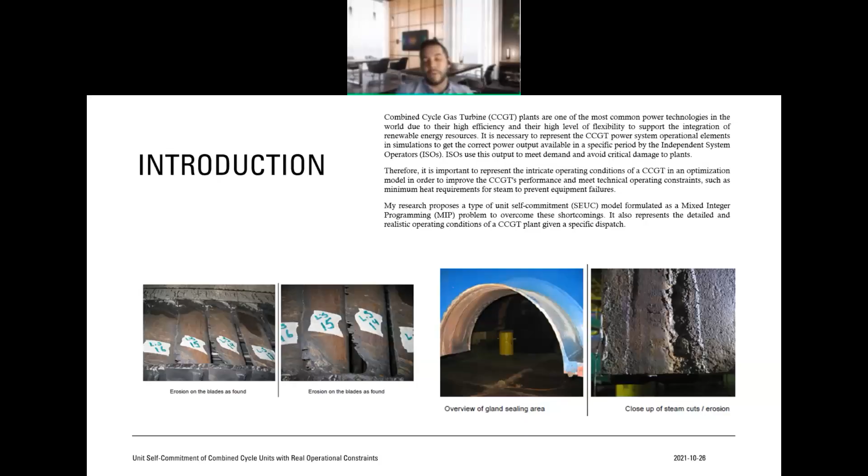Talking about what a combined cycle plant is—this is not a new technology. What we have to say about this technology is that it's the coupling of two different cycles, the Rankine cycle and the Brayton cycle, or in other words, the steam turbine cycle and the gas turbine cycle. The output of the steam from the steam turbine is still the result of the steam produced or generated by the gas turbine. So we are looking here, for example, at one combined cycle unit with one natural gas turbine and one steam turbine.

So with the gas turbine, we produce steam that still has good thermal properties, and we pass this steam through a heat recovery steam generator, or HRSG element, as we know it in the territory. Then the steam is used in the steam turbine to generate more power. So this configuration allows a very efficient use of the fuel.

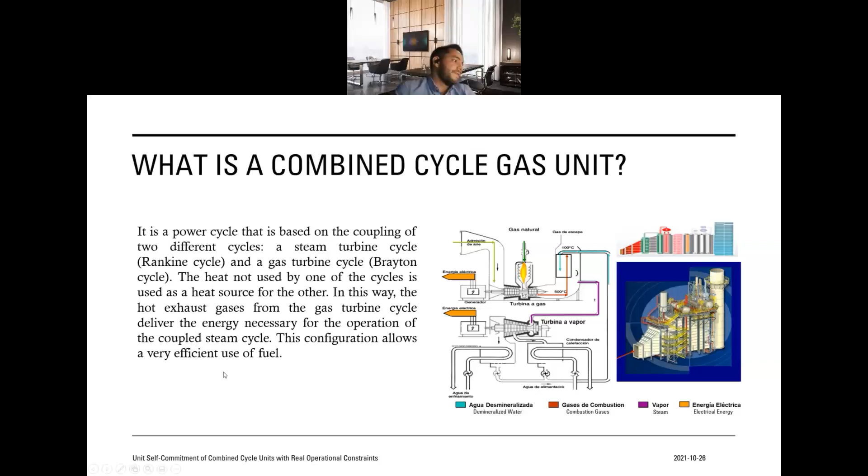Now I'm going to talk about another concept, the dispatch method. Why do we do a dispatch method? Well, we do the dispatch, or economic dispatch, because we need to optimize three basic energy industry functions or requirements: the instantaneous equilibrium between supply and demand—related to frequency—network congestion management, and the short-term electricity trade.

These three basic energy industry requirements become an output of the dispatch in a spot market.

So we have two options to do this: we can do a decentralized dispatch or bilateral model, like we have a lot in Europe, or a centralized dispatch, or pool model. In this kind of centralized dispatch, we have two options, a tight pool or a loose pool. A tight pool is a dispatch based on cost, where the ISO decides which plant is going to generate for the next day. In the loose pool, it's a dispatch based on prices or bids, where the owner of the generation makes a bid.

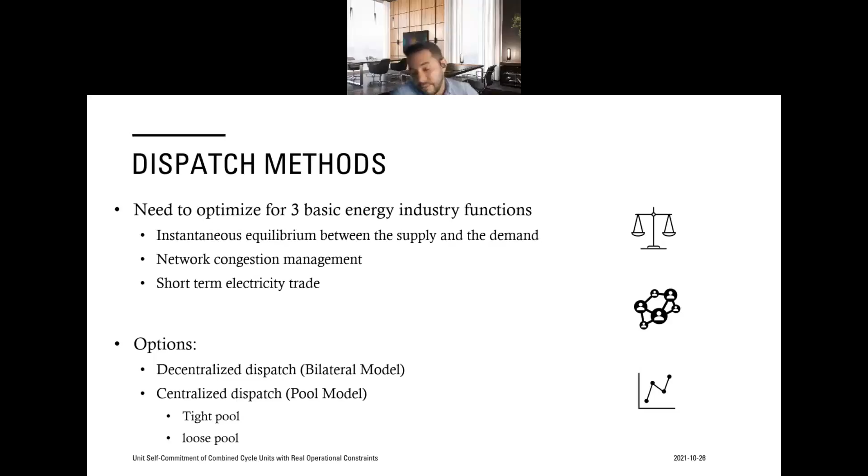Colombia is the only country in South America that has a loose pool market. The other markets in South America are tight pool. This makes Colombia a very interesting market to study, because the owner of the generator decides what to do through the bid. So if you don't want to generate the next day because you don't have the main resource, because you don't have fuel, you can bid a high price to not get into the order of the dispatch.

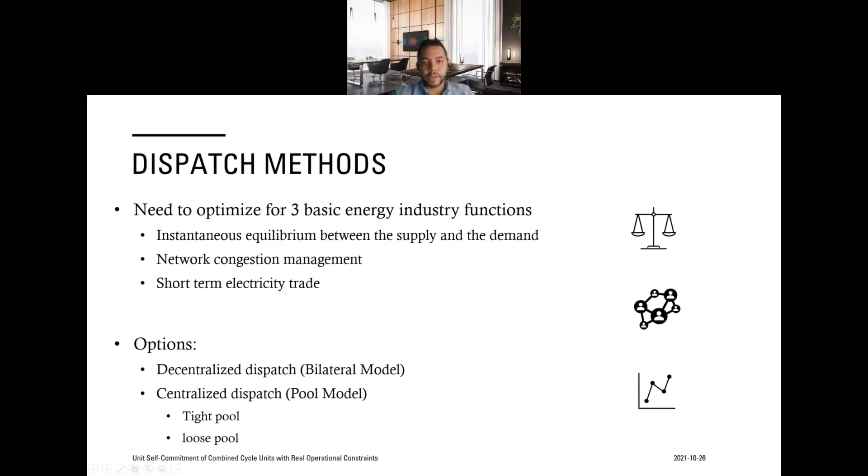I'm going to talk more about the energy mix in Colombia. The energy mix in Colombia is based on hydrothermal generation: 70% hydro, 30% thermal. This makes Colombia an energy system vulnerable to extreme weather events like the El Niño phenomenon, low influx, or extreme dry season.

When we have an El Niño phenomenon, we experience a very high dry season, and at this moment the system gets very vulnerable, because the problem in Colombia is not the power, it's the energy. If we don't have enough energy in the reservoirs of our hydro plants, the ISO is going to suffer a lot during real-time operation, because you need that energy available in the reservoir to meet the demand.

Right now, the installed capacity is about 17 gigawatts, but next year the picture will change with the integration of renewable energy resources, solar and wind. About 10% of the energy needs are going to come from renewable energy resources, plus 60% from hydro.

This means that right now our system has a lot of uncertainty due to the influx of hydrology, and we are going to add more uncertainty with the renewable energy.

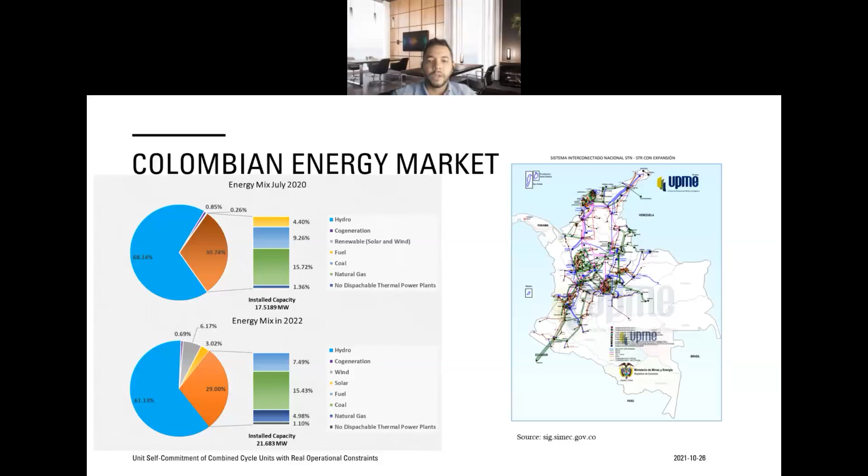In these slides, I'm explaining the process of the spot market dispatch. First, all the generators, all the owners, all the utility companies, and the demand have to report and declare the state of availability of the facilities that they have.

For example, in our company, TEBSA, we have to report to the ISO the day before, the availability of the amount of energy that we are able to bring or generate for each hour of the next day, for the day-ahead market. And we have to bid a price for that energy.

So the ISO has to receive all that input from all the companies in the system or market, and it solves a unit commitment problem. Then the result of that unit commitment problem is a plan, a dispatch, where generation has a commitment to deliver an amount of energy for each hour, for the operation day.

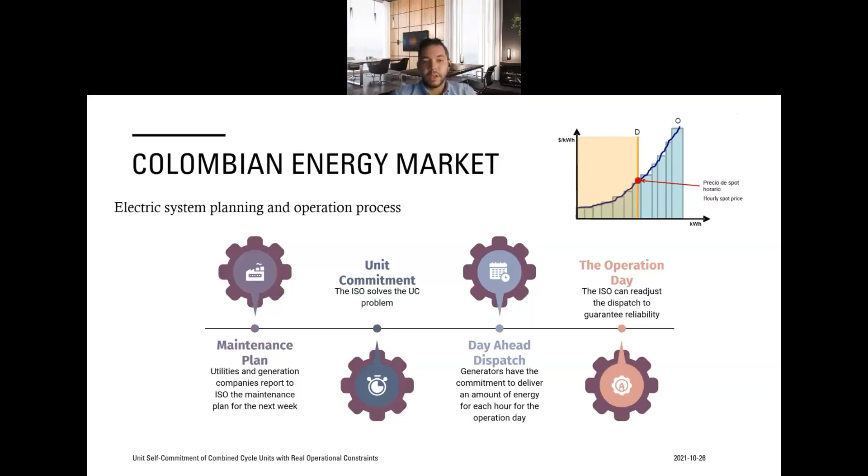So during the operation day, the ISO can readjust the dispatch to guarantee reliability. This is an example of the unit commitment that we have every day here in Colombia. The unit commitment is hourly; hourly we have an amount of energy that we have to deliver.

If you can see, there is a lot of hydro, shown in blue color, that is in the base of the dispatch. This is because in normal conditions in Colombia—meaning normal hydrology, or when the hydrology is above or at the average of the historic inflow—we're going to see a lot of hydropower plants in the unit commitment.

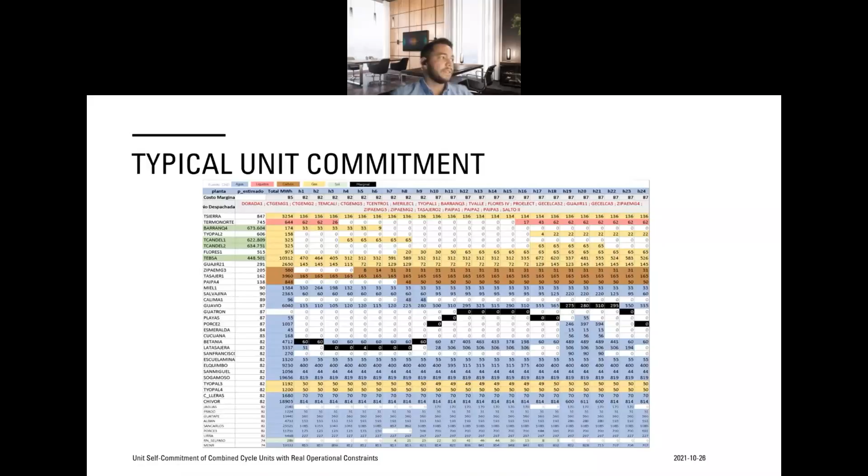And we can see in yellow the natural gas plants, which always have an important role in our system, like, for example, a combined cycle unit that TEBSA has.

In Colombia, we have a kind of rules to follow, and in those rules, we can report or accept a model or another model. I'm going to explain more about that.

In the startup ramp model 1, we can have 3 kinds of startup ramps: hot, warm, or cold ramp. Each generator thermal power plant has to declare energy blocks for this startup ramp. Also for model 1, the startup ramp has to declare a shutdown ramp in hourly energy blocks. There is another ramp, the up-down ramp, that could be model 2 or 3.

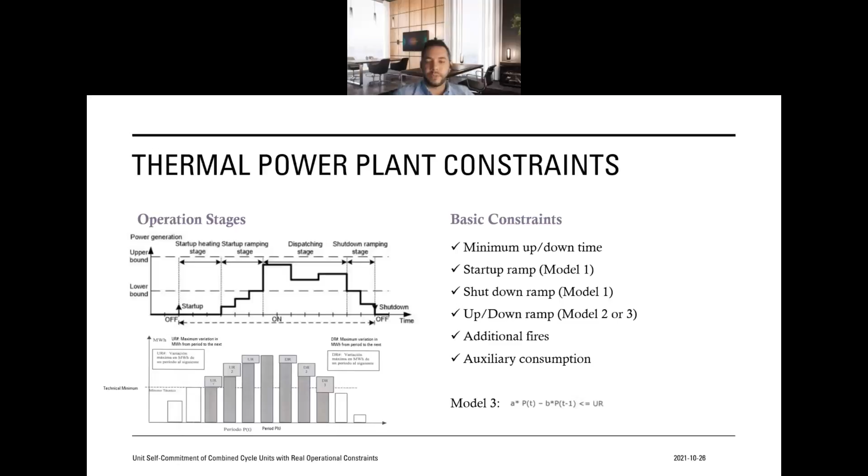Okay, I'm going to stay here in this slide because it's the most important slide of the presentation. Here we will explain the work that we have developed in this research. So for TEBSA, combined cycle plant, we need at least 2 gas turbines to start 1 steam turbine.

Here we can see in the graph that, for example, we start the first gas turbine, and then we start the second gas turbine, until we have two gas turbines online. The second constraint describes how many hours you need to warm up the gas turbine.

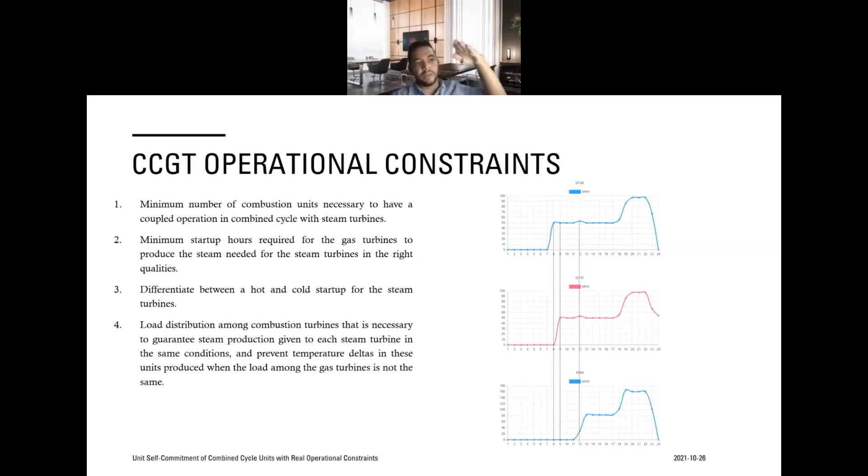Okay, the problem description. Right now, the Colombia ISO doesn't have a correct model to simulate the combined cycle unit here in Colombia, in our system. So today, the ISO simulates the TEBSA combined cycle gas turbine in an inexact model that has a Visual Basic macro. This model doesn't have the most important combined cycle gas turbine operational constraints that I mentioned before.

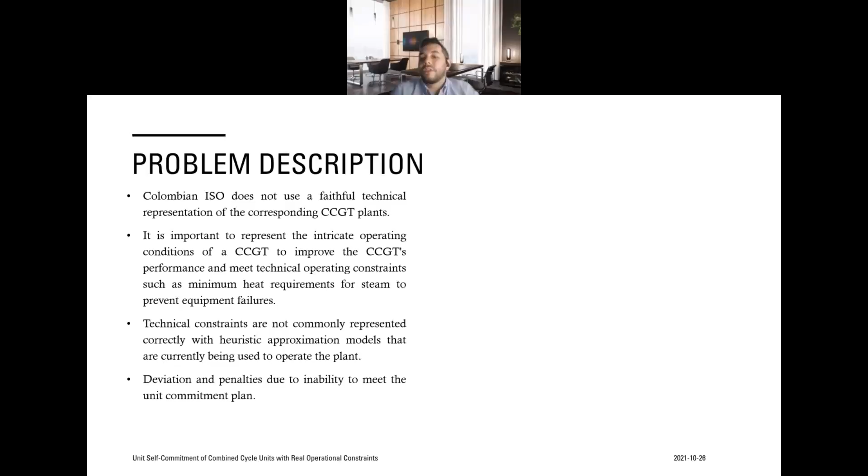So this could end in equipment failures or thermomechanical fatigue. The combined cycle gas turbine plant couldn't meet the unit commitment plan because the Excel model output will be far from the current output that the plant can give. So it will result in deviation of the unit commitment plan and also in penalty.

So right now we have an Excel model like this that is not the correct way to represent or simulate our plant.

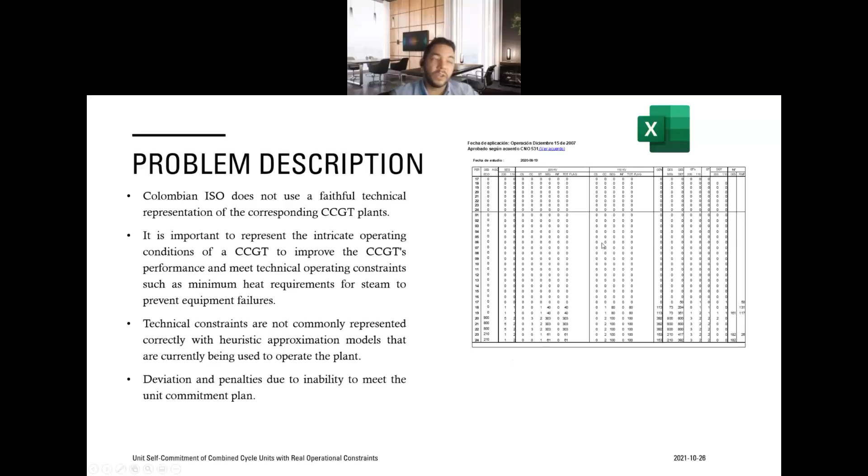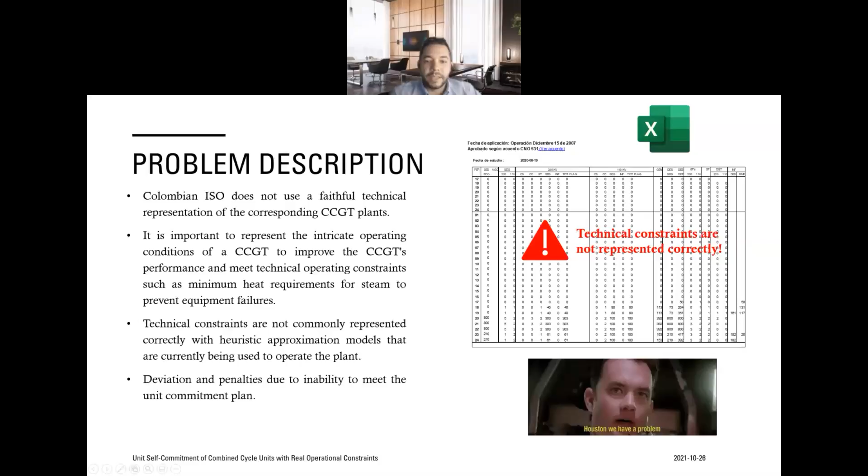Technical constraints are not represented, so we have a problem right now. So what we did is to develop this model, and I'm going to try to explain this mathematical problem of simulation in a simple way. I'm not going to focus on the mathematical equation, but I'm going to try to explain the optimization model that we developed. First of all, this model is an optimization model, and it's a mixed integer problem, a MIP problem, because the unit commitment variable should be 1 or 0.

In other words, the turbines are on or off. Talking about the objective function of the optimization model, the objective function aims to minimize the total cost of the fuel used to produce energy, and to minimize the startup of each unit, because you need fuel to start up a unit. For each unit of the combined cycle, you need fuel.

Also, they are penalized in the not served energy, the waste of steam, because as I told, with the gas turbine you produce steam, you generate steam. But if that steam is not used to produce generation with a steam turbine, you are wasting steam. You are not taking advantage of the efficiency of this kind of technology. And we penalize also the imbalance load between the gas turbines to avoid delta temperatures in the steam turbine.

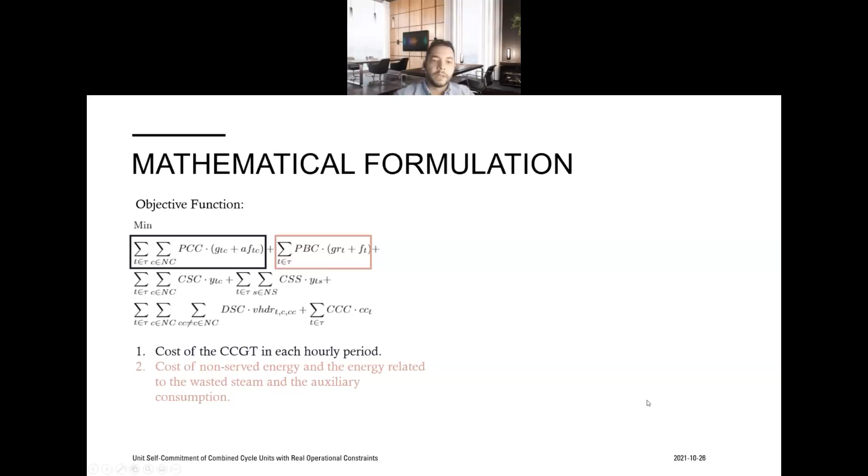Okay, I'm going to talk more about the constraints of the problem. The first set of constraints talk about the energy balance constraint. This represents one of the most important inputs of the model because it describes all the energy dispatch that we want to simulate. So here, the input is L, or the load, and the output is the GCCT variable. These variables are the non-served energy, and E is a slack variable.

The second set of constraints are related to the operational limit for both gas and steam units. This operational limit constraint guarantees the minimum and maximum output of the unit. And finally, the third set of constraints describe the combined cycle constraints. This set of constraints guarantee the coupled operation between the gas and steam turbine if there are at least the minimum number of gas turbines required to operate a steam turbine. For example, in this equation, this constant MUG is the minimum number of gas turbines that we need to operate one steam turbine.

In this part of this equation, we are describing when the steam turbines are doing a hot or cold startup, depending on the thermal state of the gas turbine. I'm going to talk more about this part in the next slide.

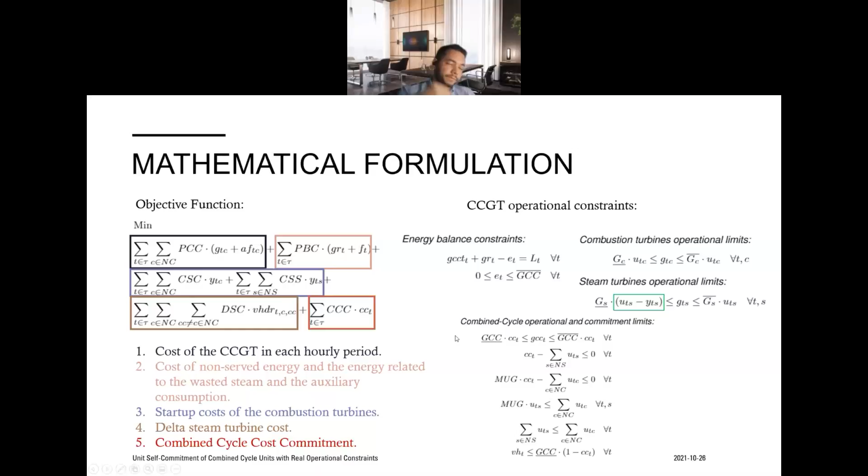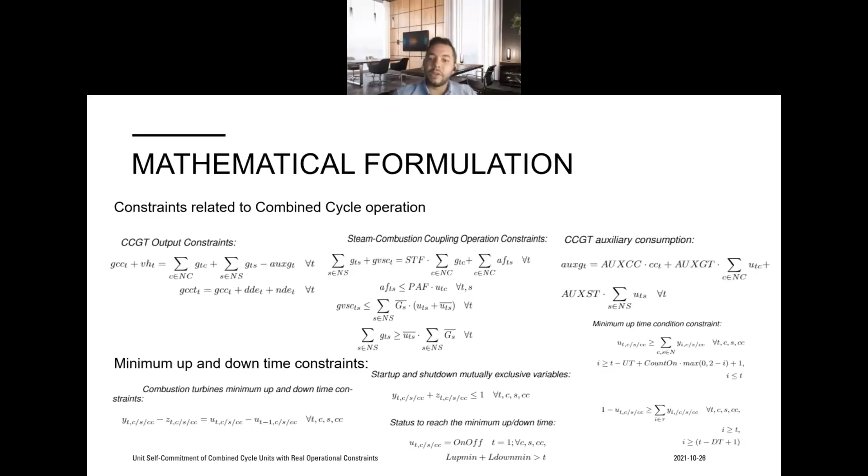There is another constraint here related to the unit commitment constraint, as I told you, the minimum up and down time constraint for the unit, represented here below in the slide.

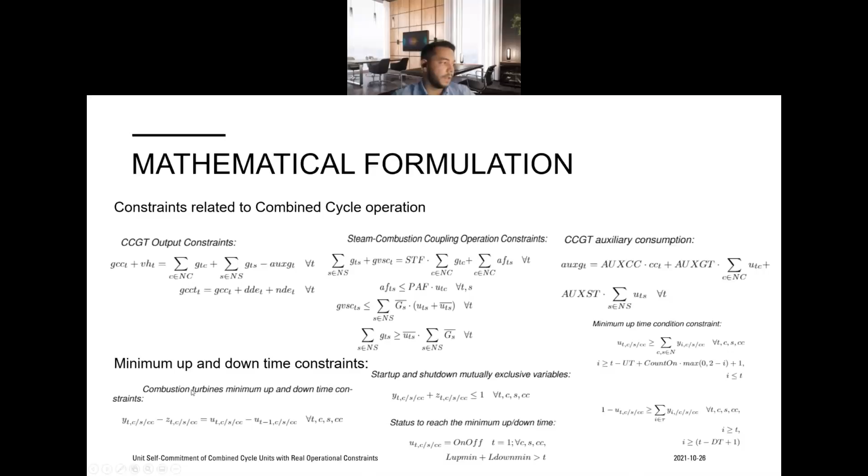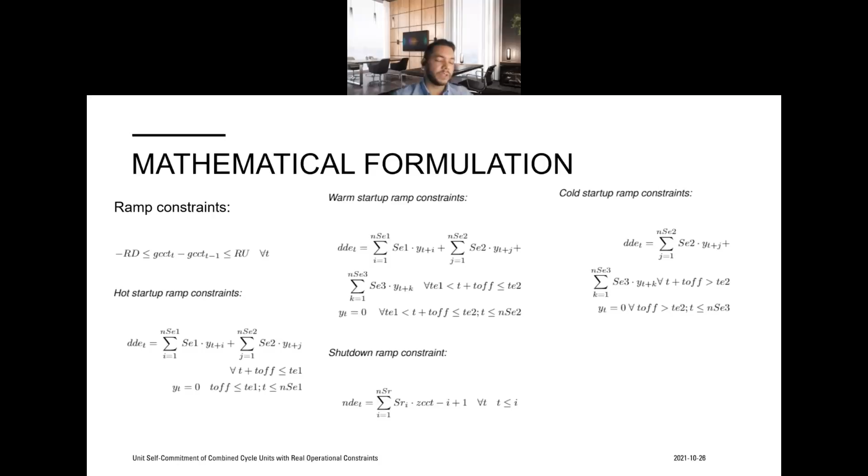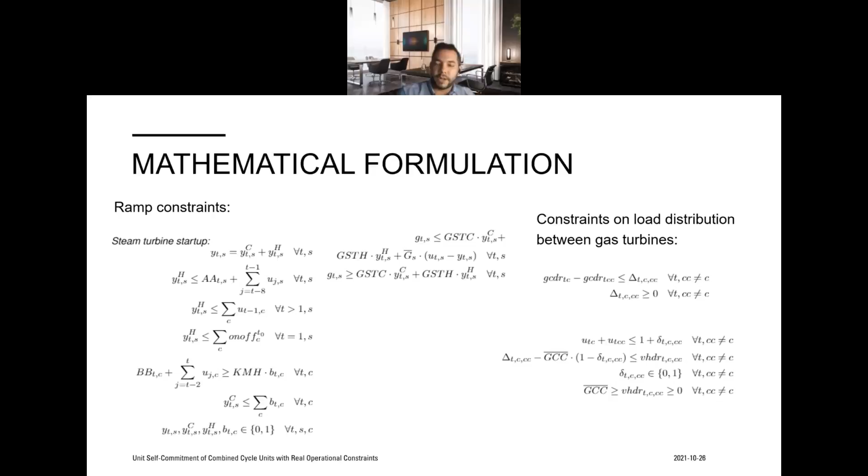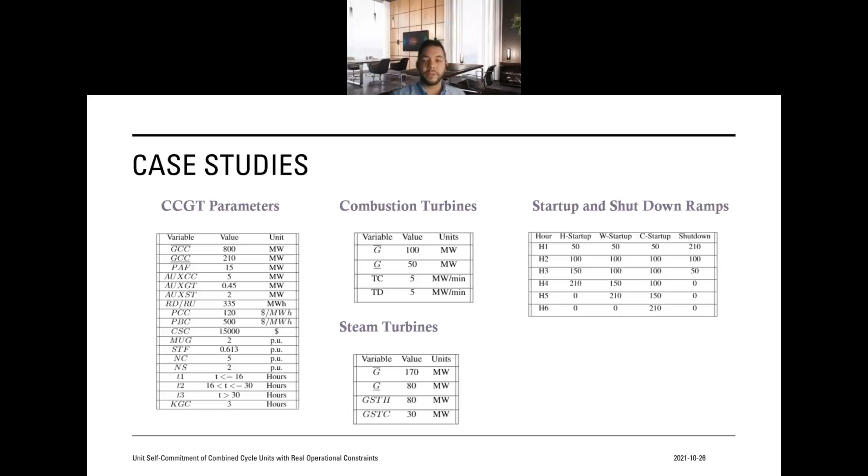Talking more about the study cases, these are the parameters of the combined cycle gas turbine plant. These are hypothetical parameters, not real, but close to the numbers we have in our plants here in TEBSA in Colombia. So here we have, for example, the installed capacity of the combined cycle plant, for this example, is 800 megawatts. We also have the minimum energy output, that is 210 megawatts.

We also have, for example, the production cost, that for this example is $120 per megawatt-hour. The cost of the non-served energy is $500. The cost of the startup of each unit is $15,000, for example. The MUG factor, that is the minimum number of gas turbines that you need to start up one steam turbine, that is 2.

The steam factor: the number of gas turbines is 5, and steam turbines is 2. So in this plant, we're going to have 7 units, 5 gas turbines and 2 steam turbines. Also, we have here the parameters related to the combustion turbine and the steam turbine.

Each combustion turbine has a start capacity of 100 megawatts, a minimum output of 50 megawatts, and the steam turbine has a maximum capacity of 170 megawatts and a minimum output of 80 megawatts. This is very important: when the steam turbine makes a hot startup, it has to make a ramp of 80 megawatts. And when the startup ramp is a cold ramp, it's going to produce 30 megawatts in the first hour.

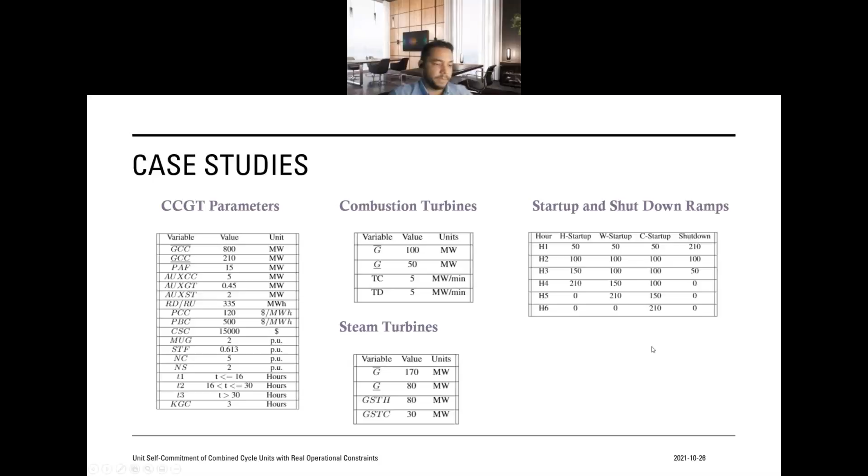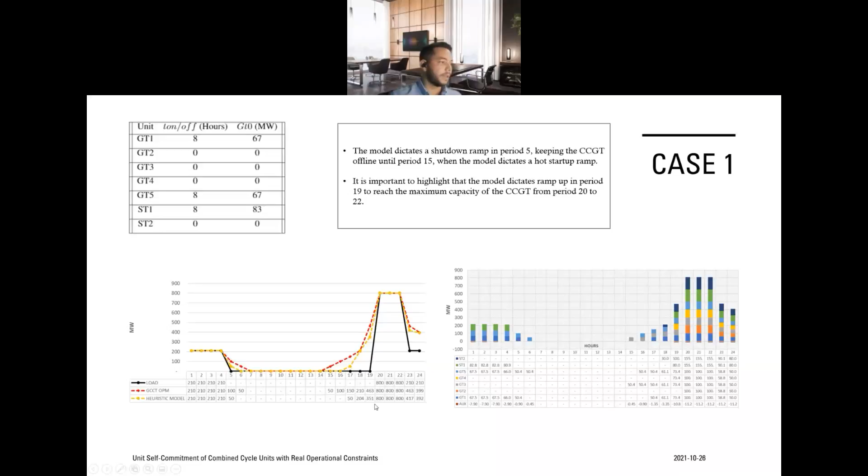We can see that our model dictates a smooth shutdown compared to the yellow, or heuristic, model. The red line is above the yellow line, meaning our shutdown is smooth. Then the model decides to make a hot startup at hour 15.

We can see the startup is a hot startup starting at hour 15. We can also see very interesting information in this graph on the right side of the slide. For example, steam turbine number 1 makes a hot startup, and steam turbine number 2 makes a cold startup.

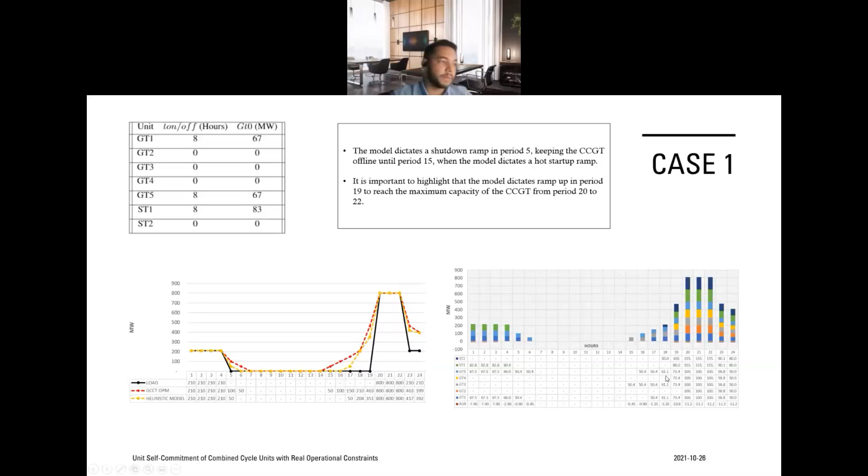They can only make a startup if we have at least 2 gas turbines online. That is what we see, and we can make sure our model is taking this constraint into account very faithfully.

In this other example, the combined cycle unit plants are offline at the beginning of the day, and we want to put the plant into maximum capacity from hour 20 to hour 22. But what is very important here is that our model dictates a warm startup.

It's not a hot startup, like the heuristic or existing model here. The heuristic model makes a hot startup, and that's not true, because the condition or thermal state of the plant is cold, or rather cold or warm.

So you have to make a warm startup to make sure that all the constraints and equipment of the plant will not fail or suffer thermal mechanical fatigue.

Also, we can see here on the right of the slide that the steam turbine makes a cold startup: 30 for the first energy output at 18 hours for steam turbine number 2, and also the first output energy in the first hour for steam turbine number 1 is 30. So that means the plant, or our model, is making the correct decision.

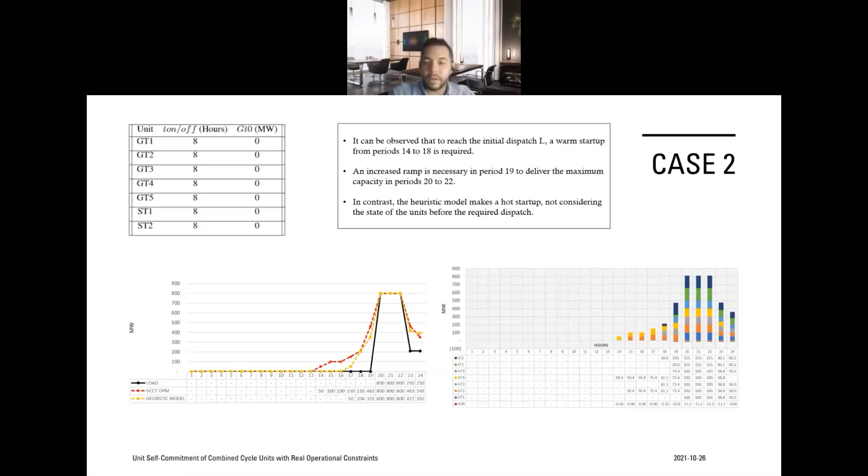Okay, the conclusion and recommendation. We propose an original formulation for individual gas and steam turbine units to guarantee the specific characteristics of the steam needed to operate steam turbines.

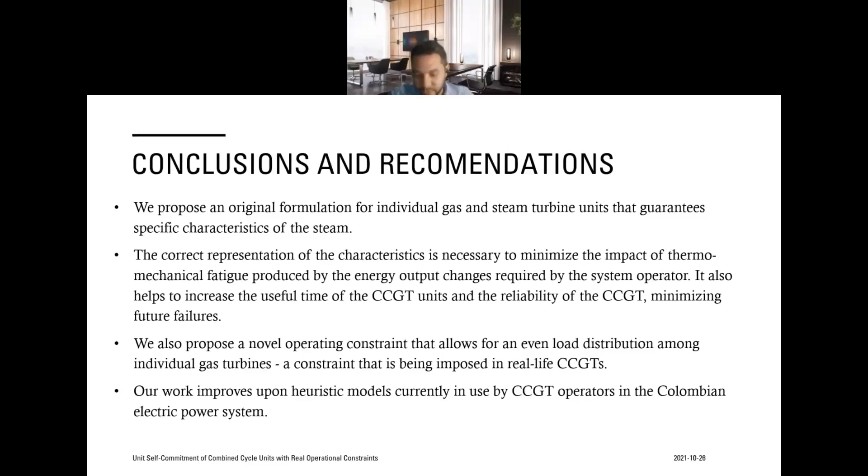The correct representation of these characteristics is necessary to minimize the impact of the thermomechanical fatigue produced by the energy output. That is very important, and it's important that the ISO take these constraints into account in the unit commitment model.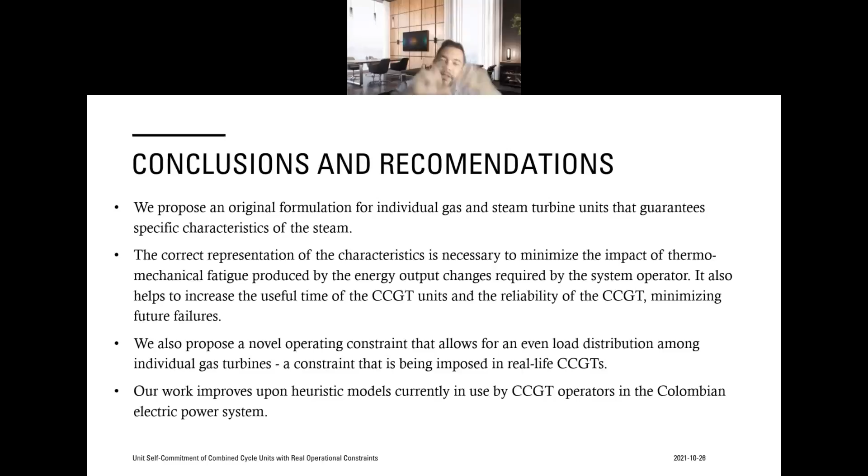It also has to increase the useful life of the combined cycle unit and the reliability of the combined cycle, minimizing future failures. We propose a novel operation constraint to allow for an even load distribution among individual gas turbines, to avoid delta temperatures in the steam rotors. Our work improves upon the heuristic model we have right now.

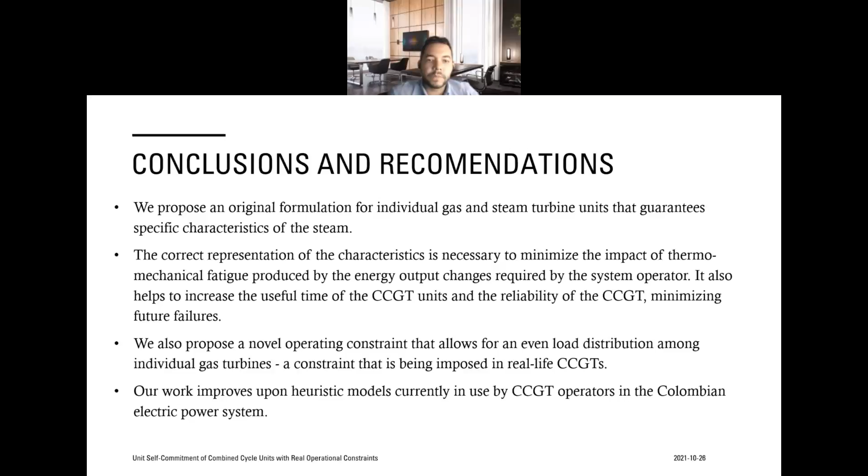Future work, of course, we'd love that the ISOs can represent or use this model into the unit commitment problem to improve the solution of the dispatch that they do right now. And of course, to take into account the important role that the combined cycle gas turbines have in our system. And of course, we expect that this work can be used for work in other ISOs and other markets around the world. Okay, thank you very much for your attention.

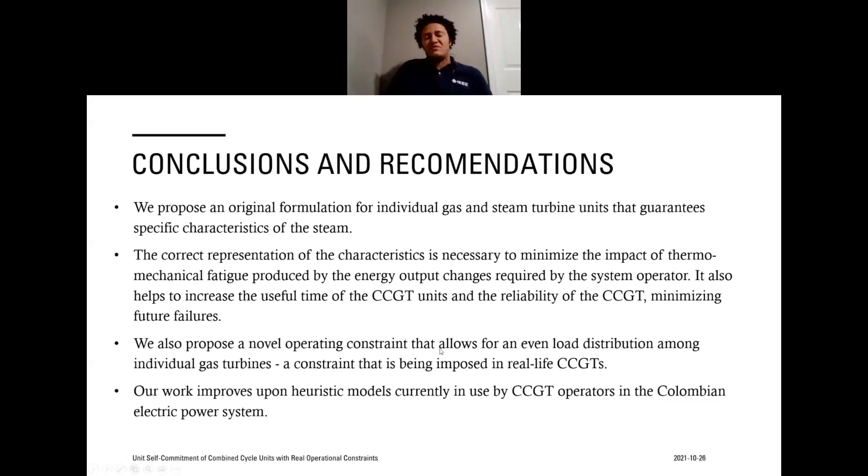I just want to point out, I think the beauty of Mauro's study and research with Sonja is, usually here in the US, this kind of plants, like coal plants, nuclear plants and combined cycle plants, has been used as base load power plants, serving all the time. Due to the fact that they cannot change their power output quickly, they have been used all the time as a base load. You turn on the generator, it's online, and you keep it there for a few days before you actually think about turning it off or shutting down these plants.

With the introduction, as Mauro has mentioned, of renewable generation, and you see a lot of high penetration of this generation for sure, there is going to be a need for all of these combined cycle plants, for example in this case, to adapt, to now be able to vary, to change their output. So this kind of mathematical models, reflecting all of these physical constraints, will definitely help with modeling these plants and how the ISOs are going to schedule these plants in the near future. Again, this has not been a problem so far here because of the way that these plants have been scheduled and used, but for sure it's going to happen, and it's going to happen soon.

So I think that is the remark, and the message here for Mauro's research, and it's really interesting work. Congratulations, Mauro, and thank you so much for joining us and sharing all of this knowledge with the group here.